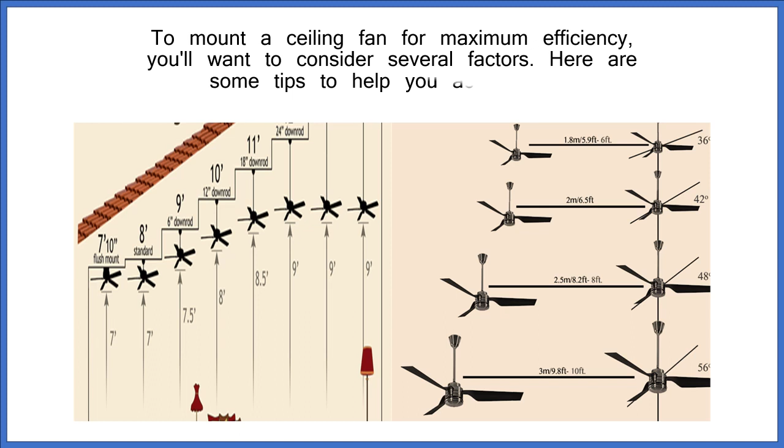How to mount ceiling fans to get maximum efficiency. To mount a ceiling fan for maximum efficiency, you'll want to consider several factors. Here are some tips to help you achieve this.

Location and height. Ensure the fan is installed in the center of the room and hung at the optimal height. For standard 8 to 9 foot ceilings, the fan should be hung about 7 to 9 feet above the floor. Taller ceilings may require downrods to maintain this height.

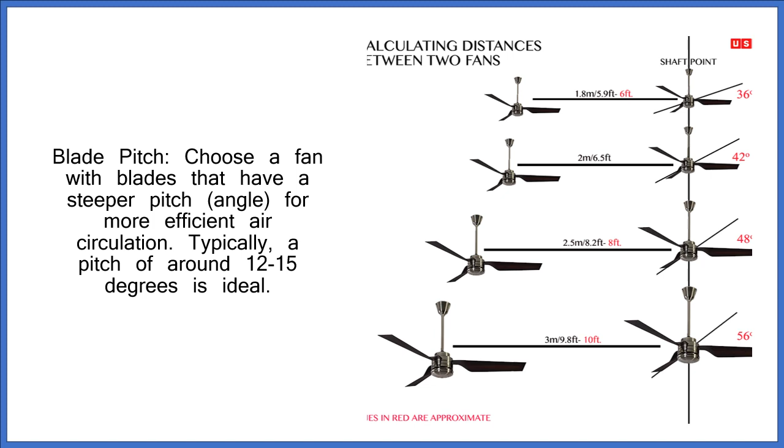Blade pitch. Choose a fan with blades that have a steeper pitch angle for more efficient air circulation. Typically, a pitch of around 12 to 15 degrees is ideal. Fan size. Match the fan size to the room's dimensions. Larger rooms need bigger fans for effective air circulation.

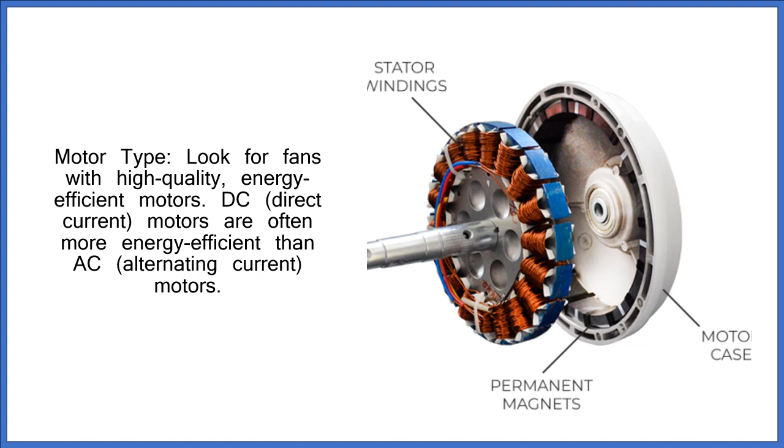Motor type. Look for fans with high quality, energy efficient motors. DC, direct current, motors are often more energy efficient than AC, alternating current, motors. Blade material. Choose fan blades made of lightweight, durable materials. Wooden or composite blades are common choices.

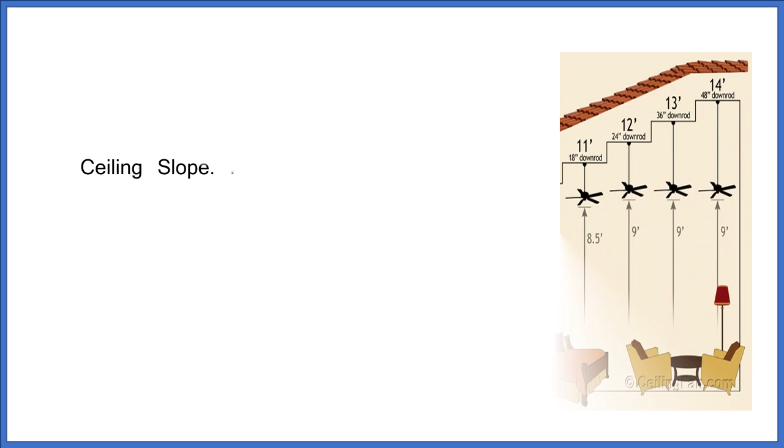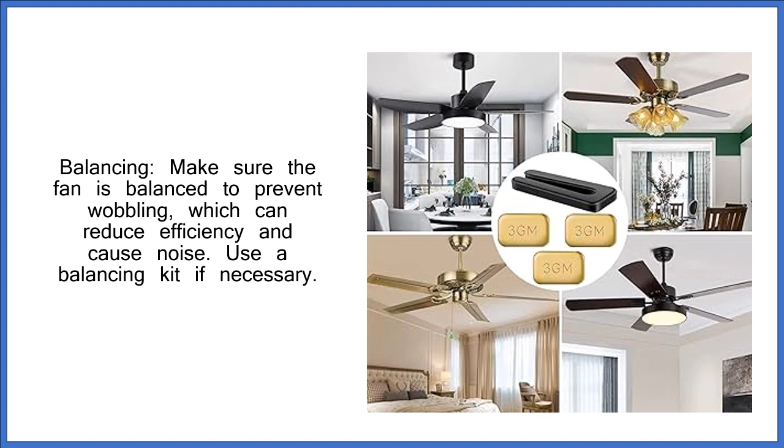Ceiling slope. If your ceiling has a slope, ensure you use a sloped ceiling adapter or fan with an adjustable mounting angle. Balancing. Make sure the fan is balanced to prevent wobbling, which can reduce efficiency and cause noise. Use a balancing kit if necessary.

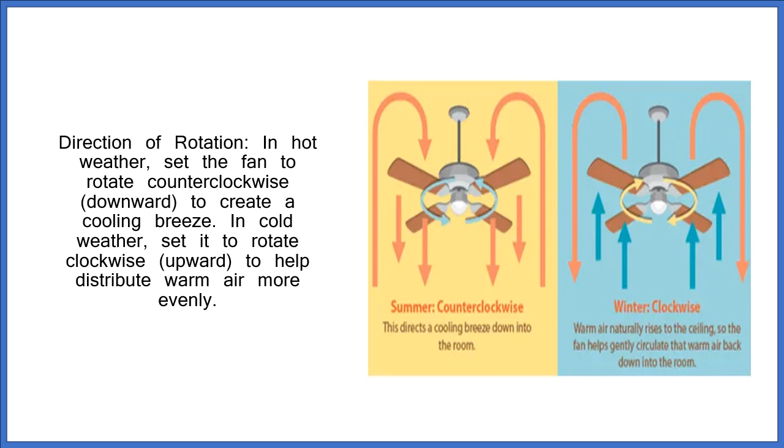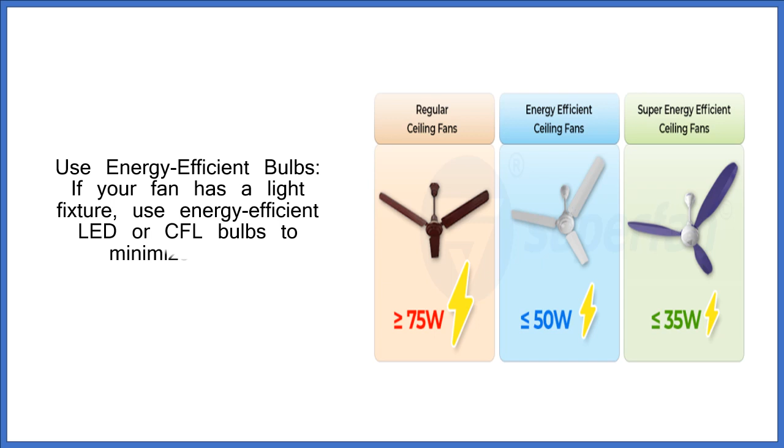Direction of rotation. In hot weather, set the fan to rotate counterclockwise, downward, to create a cooling breeze. In cold weather, set it to rotate clockwise, upward, to help distribute warm air more evenly. Use energy-efficient bulbs. If your fan has a light fixture, use energy-efficient LED or CFL bulbs to minimize energy consumption.

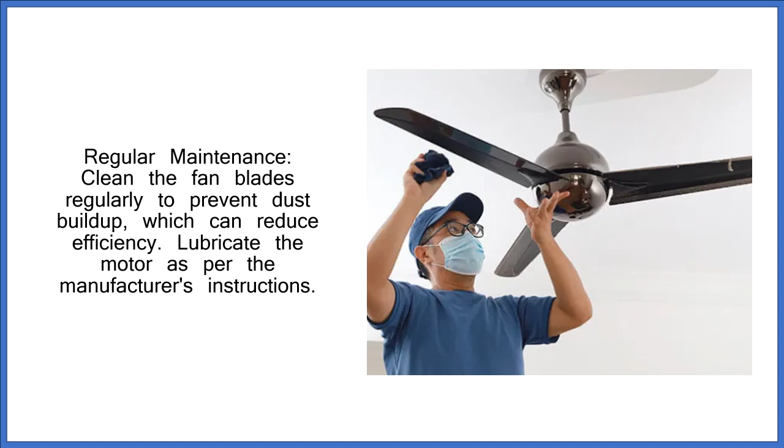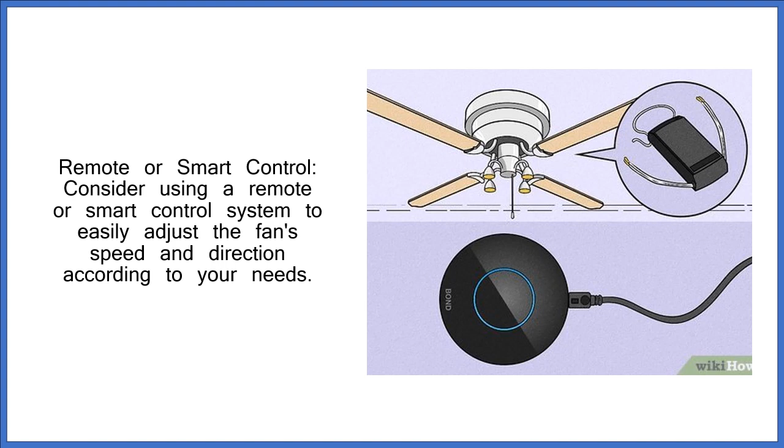Regular maintenance. Clean the fan blades regularly to prevent dust buildup, which can reduce efficiency. Lubricate the motor as per the manufacturer's instructions. Remote or smart control. Consider using a remote or smart control system to easily adjust the fan's speed and direction according to your needs.

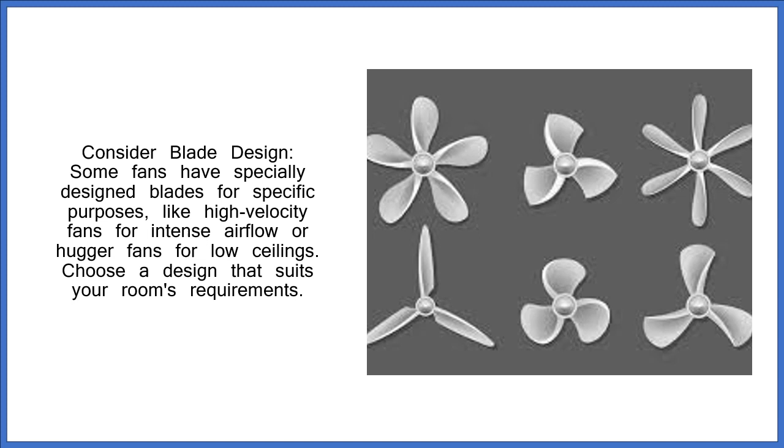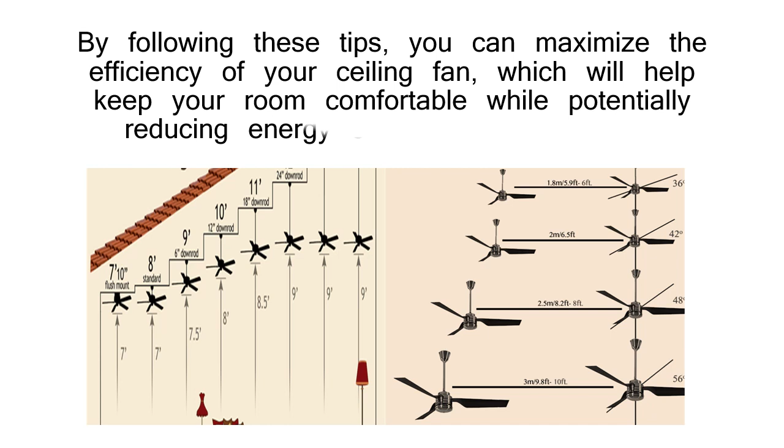Consider blade design. Some fans have specially designed blades for specific purposes, like high-velocity fans for intense airflow or hugger fans for low ceilings. Choose a design that suits your room's requirements. By following these tips, you can maximize the efficiency of your ceiling fan, which will help keep your room comfortable while potentially reducing energy consumption and costs.